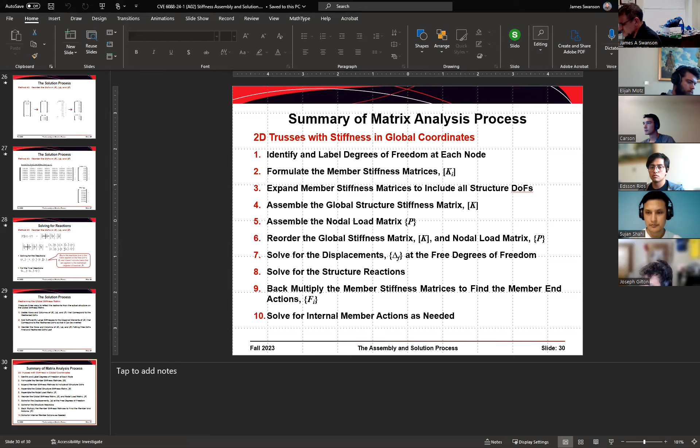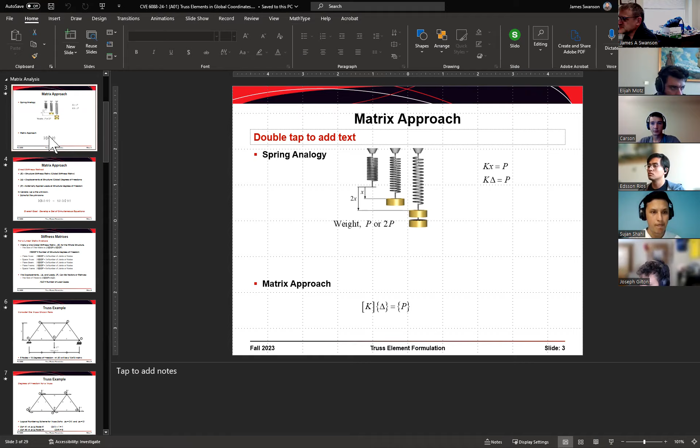So I have a series of 5 or 6 different analysis lectures that I worked through. The way these are structured is that the first 2 kind of go together. I have it broken down into lecture 1 and lecture 2, but after lecture 1, you still don't quite know enough to do anything. So we're going to try and work through both of these lectures and see how far we get today. This is a little bit on the technical side.

So if you're somebody who didn't like the linear algebra classes you've taken, or the matrix analysis operations, this is probably going to be the least entertaining or least interesting part of the class for you. But I think going through this material and understanding how the matrix operations are performed behind the scenes makes you a better user of the software in the end. So even if you don't do the matrix operations when you use SAP 2000 or visual analysis, understanding what's going on behind the scenes will make you a better user of the software in the end. So that's why we go through this.

All right, so everybody probably remembers the spring system that you were taught in physics. The idea is, if you have a spring with some known stiffness, you apply a load to it, you get some displacement X. If you apply 2 times the load, you get 2 times the displacement X. So we can write the relationship that K times X is equal to P, or K times delta is equal to P.

In that relationship, K is the stiffness of the spring, X or delta is the displacement that results, and P is the amount of force or load that's on that. So what we're going to do is expand on that single degree of freedom system, one value for delta, into a multiple degree of freedom system that is more usable for us in structural analysis.

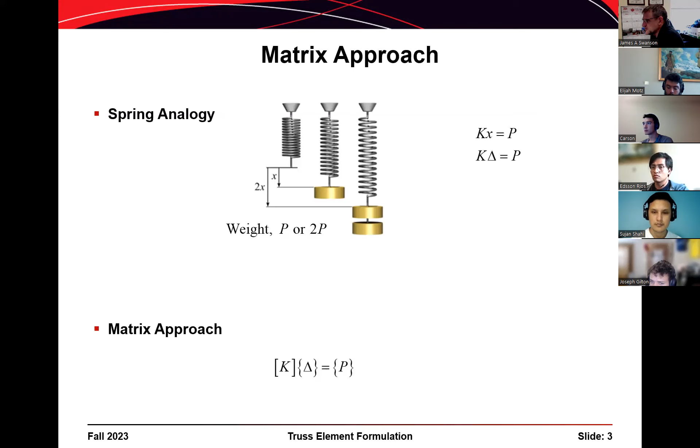We're going to rewrite that equation, K times delta equals P, in the form of matrices. We end up with a stiffness matrix K times some displacement vector delta equal to a vector of loads P. In that equation, K is the structure stiffness matrix, and I'm careful to define it as the global stiffness matrix. Delta is a matrix of displacements that the structure will undergo due to externally applied loads, and the P vector is the externally applied loads on the structure.

So I'm careful here with my notation. We're going to introduce another value of K in a minute, K sub I, which is a stiffness matrix associated with a specific member within the structure, and that's different than the structure stiffness matrix. So the notation gets a bit tedious — K is different than K sub I, and I just want to call that out to avoid confusion.

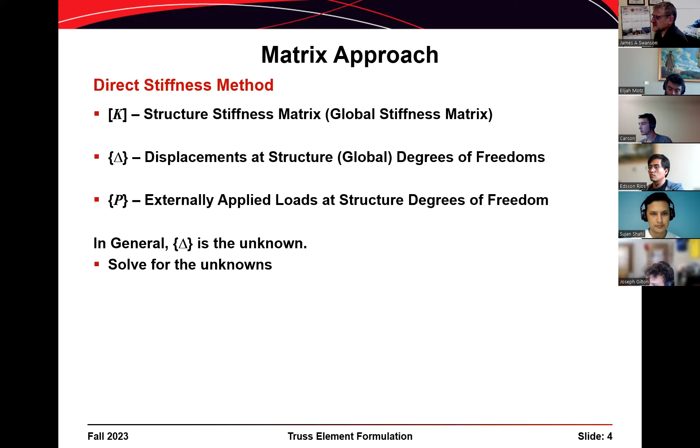The premise is that the displacements are the unknown quantities. If we know what the stiffness matrix K is, and if we know the loads applied to the structure, we can solve a system of equations to determine delta. Basically, in matrix operations, we would invert K, multiply K inverse times the load matrix P, and that gives us the displacement vector delta.

Overall, the goal is to develop a set of simultaneous equations that can be solved for the unknown displacements. This has its roots in linear algebra, and it's ideal for a computer because computers are perfect at solving sets of simultaneous equations. That's one of the ideal solutions for a computer. So if we can structure the problem to get a system of equations, the computer is an ideal tool to solve it.

So some definitions. If we have a linear static analysis, that means the loads are static loads — we're not talking about dynamic loads like you might see in an earthquake. If everything is linear, with no yielding or nonlinear behavior, then there is one global stiffness matrix for the whole structure. There's only one — not two, not zero — exactly one global stiffness matrix.

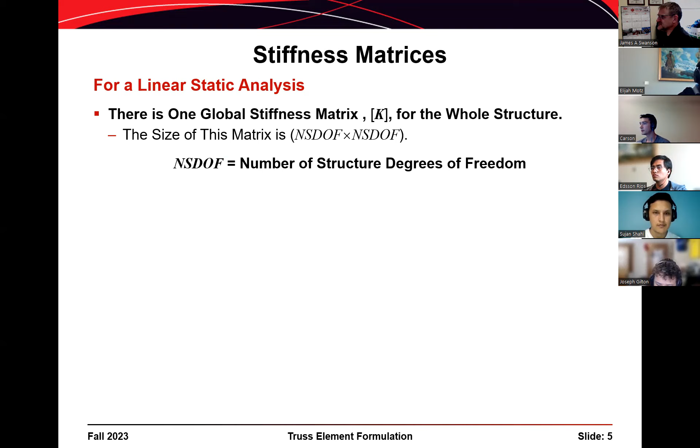The size of that matrix, which you'd call the rank if you were a mathematician, is the number of structure degrees of freedom by the number of structure degrees of freedom. So the matrix has NSDOF columns and NSDOF rows — actually, rows and then columns.

If we look at the different types of structures we can consider: for a plane truss, there are 2 degrees of freedom at every node. For a space truss, there are 3 degrees of freedom at every node. For a plane beam, there are 2 degrees of freedom per node. There are 3 for a plane frame, and 6 if we consider a space frame.

The displacements, delta and P, can be either vectors or matrices. The size of these matrices is the number of structure degrees of freedom for the rows, and the number of columns equals the number of load cases we consider.

So if we look at homework number 2 that you guys are doing for your beam stuff, there are 3 service cases, plus some load combinations that go along with it. For those 3 service cases, you would end up with 3 columns for your delta matrix and 3 columns for your load matrix P.

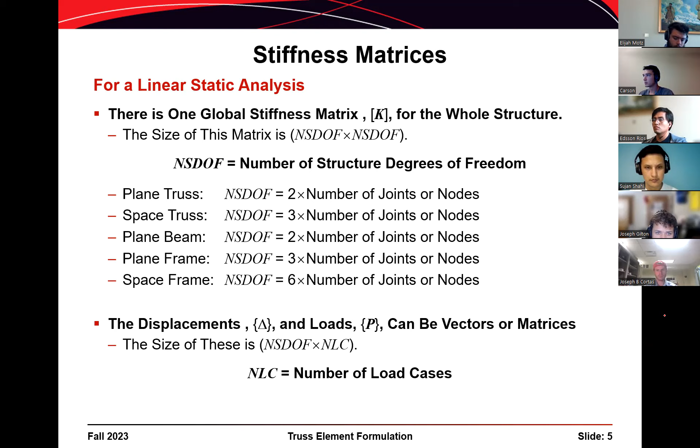All right, so let's go back to this truss that we were tinkering with last week, and we'll use this as an example. What I'm going to do is set this up as an example problem to illustrate the direct stiffness method.

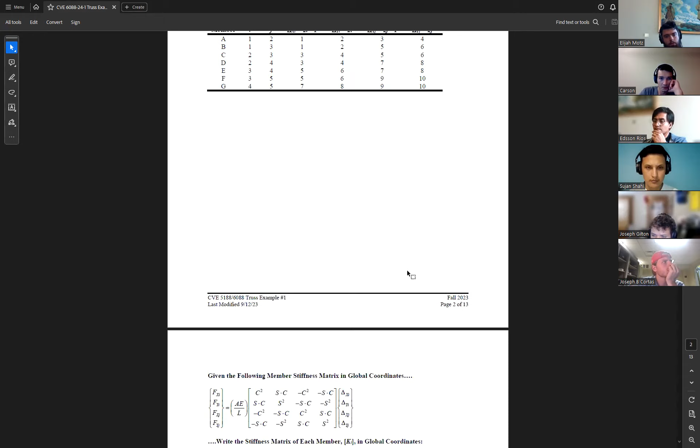For this particular truss, we have 5 nodes labeled 1 through 5. If each node has 2 degrees of freedom, then we have 10 degrees of freedom total. Our global stiffness matrix, K, will be a 10 by 10 matrix.

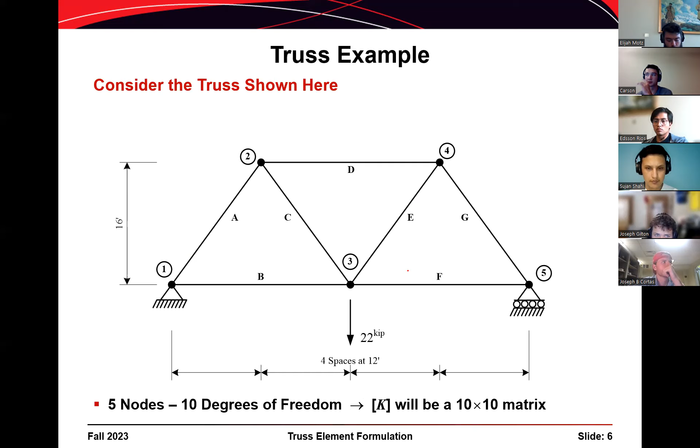So we need to number the degrees of freedom somehow. What we typically do when there's 2 degrees of freedom at each node is we label one degree of freedom 2 times I minus 1, and the other degree of freedom 2 times I, where I is the number of the node. You guys went through this exercise as part of homework number 1, so hopefully this is old hat for you at this point, something you're familiar with.

For example, degree of freedom number 1 would be the displacement in the x direction at node number 1. So 2 times I is 2 times 1, minus 1 is 1. For example, degree of freedom number 8 is the y displacement at node number 4. 2 times 4 is 8.

So what we're going to do then is define what a stiffness coefficient is. One element of our stiffness matrix, K, is K sub ij. When I use that notation, K sub ij, I is the row number, J is the column number. This is probably consistent with your math classes.

So when we look at this, then we have the stiffness coefficient Kij defined as the force at the location and in the direction of the degree of freedom I that's required to cause a unit displacement at degree of freedom J, where all other displacements are taken as 0. You could read that 5 times and still need to think about it some more. It's an involved definition, but maybe if we illustrate it here with some graphics, that'll help.

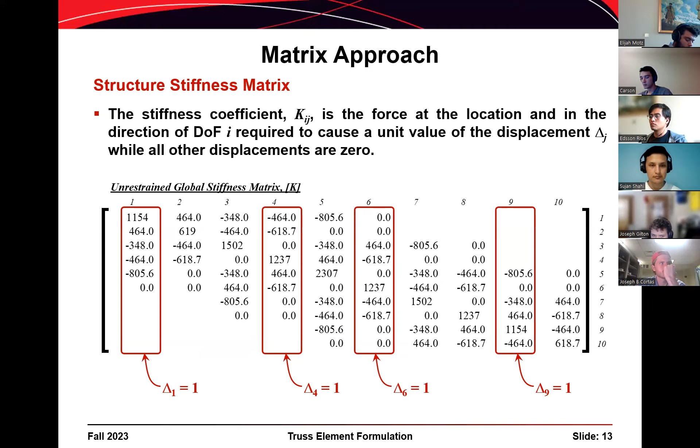All right, so that's the global stiffness matrix for the structure, K. And then now moving on to the next slide. For every structure, there's one element stiffness matrix for each element or each member within the structure. And so the element stiffness matrix has a notation K sub I, where I is the member number that you're examining. So for the truss that we were looking at, there were 7 members, so there'd be 7 element stiffness matrices corresponding to those 7 members.

For each one of these element stiffness matrices, the size is equal to the number of member degrees of freedom, and each of these matrices is also square. So NMDOF is the number of member degrees of freedom.

If we go back and look at a plane truss, there's 2 degrees of freedom at each end of a truss element or each end of a truss member. So that means we have 4 total degrees of freedom for each truss member. So each truss member stiffness matrix, K sub I, will be a 4x4 matrix.

If we go to the bottom, for each space frame member, we would have a 12x12 member stiffness matrix or element stiffness matrix. K sub I is the element stiffness matrix in terms of the global coordinate system. And we also have delta sub I, that is a vector of element displacements in global coordinate systems.

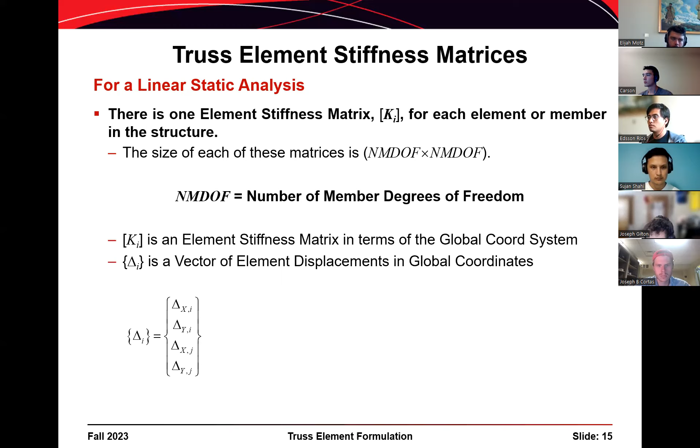Now what I'll do is bring in an element like this that has the forces outlined in there. So we have K sub I, we have delta sub I, and we have F sub I.

What's important is that we could recognize, and this is going to be the topic of a different lecture later on, that there is a local coordinate system for each one of these elements as well. So we have a capital X axis that is the global X coordinate system, a capital Y axis that's part of the global coordinate system, but we also have a lowercase x axis, a lowercase y axis that is the local coordinate system for each one of these members.

What's important is that when we have a capital K, that indicates that we have an element stiffness matrix in the global coordinate system. Later on, we'll introduce a lowercase k that is the element stiffness matrix written in local coordinates instead. I think that's the topic of the third lecture that I posted. We're not going to get there today, but if you wanted to look ahead a little bit.

There's also a local displacement vector delta, that's the displacements in the local coordinate system. And then there's a lowercase f that is the member end actions of the element in local coordinate system as well. I'll just give you a little bit of foreshadowing there, tying into the idea of local versus global degrees of freedom that we discussed last week.

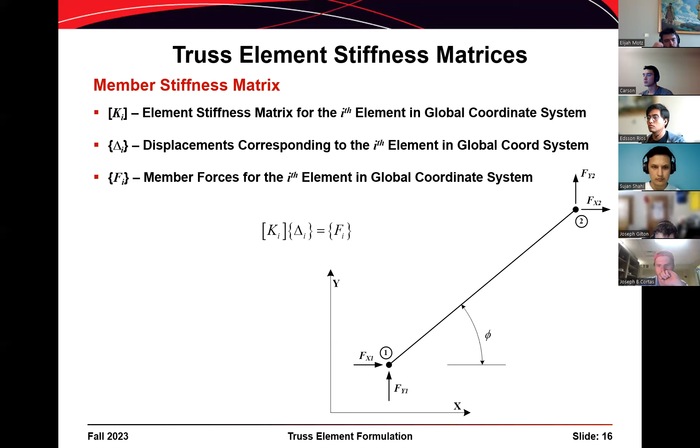In this case, F sub I becomes the member end actions, and we can use those to calculate the forces that are in the member itself. So in the context of a truss member, we would be calculating axial force. In the context of a beam member, we would be calculating shear forces and bending moments. And that's what that value of F is.

So the next trick then is, what is the element stiffness matrix K sub I for a truss element? And we can write it like this. So we have the term AE over L, which you guys will recognize as the axial stiffness for a member subjected to an axial force. And then we multiply by a 4x4 matrix of our directional cosines.

So the 1,1 element is the cosine squared. The 2,2 element is the sine squared. And then we have the cosine of phi times the sine of phi, in the 1,2 and the 2,1 element. And so that's how you determine what these element stiffness matrices are, by using that formulation.

Now, you'll note that there's two sets of repetition here. Number one, this matrix is symmetric like the global structure's stiffness matrix is, but there's also some symmetry in that block is equal to that block there, and then this block up here in the upper right is equal to this block down here in the lower left. So really, there's only four discrete values, well, maybe even 3 discrete values, not counting plus and minus signs that are in there.

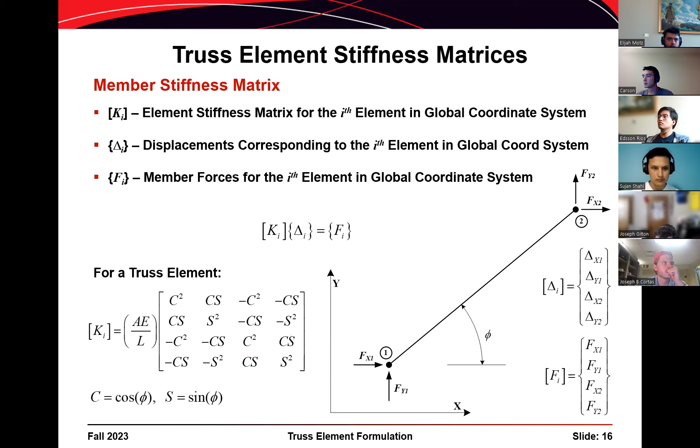All right, to determine the element stiffness matrices, you can calculate the directional cosines. I think I showed this slide as part of one of our introductory slideshows.

So homework number 3 is going to involve going back to the truss that you looked at in homework number 1 and calculate the element stiffness matrices, then assembling that into a global structure stiffness matrix, and then inverting it and finding the displacements. You've already done the first part of that in calculating the directional cosines and the lengths of the members. So you're not halfway done, but you're part of the way done with that.

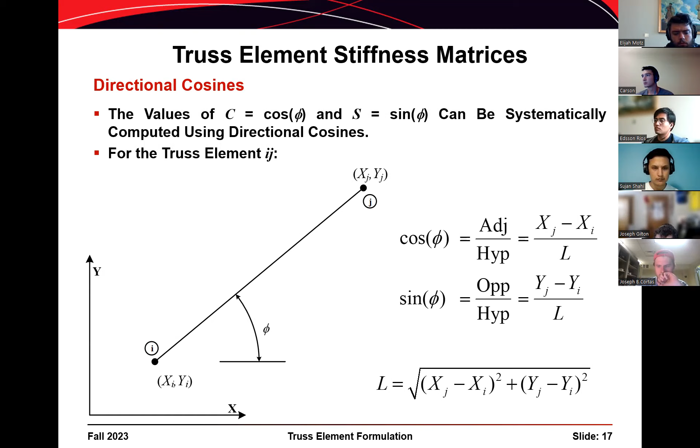So to summarize, the stiffness coefficient Kij is the force at degree of freedom I required to cause a unit displacement at degree of freedom J while holding all other degrees of freedom at 0.

And some other properties here: the stiffness matrix is always symmetric, and for a 2D truss element, this is our element stiffness matrix. You can write it a couple of different ways. I've got it written as AE over L times the 4x4 matrix of directional cosines, and you could also write it with K11, K12, K13, etc.

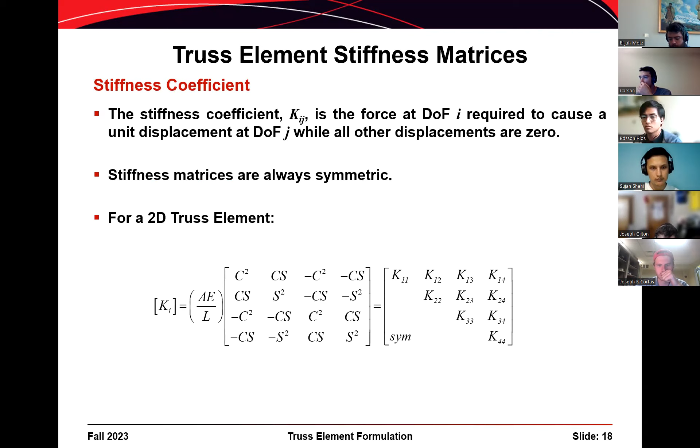Now, to determine this element stiffness matrix, we go back and use the same approach that I illustrated before. What I'm going to do is impose a unit displacement that corresponds to each of the 4 degrees of freedom for the member.

When I do that, I'm going to need forces that are required to hold each one of those degrees of freedom at its displaced magnitude or displaced location. So if I move that degree of freedom to 1 to the right at delta x at the first node, then I'm going to need forces that correspond to that.

Let me go back to red. So I'm going to need a force here. I'm going to need a force there. I'm going to need a force up here, and I'm going to need a force like that.

So this is going to be the force in the 1 direction. This is the force in the 2 direction resulting from a 1 degree of freedom displacement. This is the force in the 3 direction corresponding to a 1. And this is the force in the 4 direction corresponding to a displacement in the 1 degree of freedom.

So basically what I've done is derived the first column in that stiffness matrix. Note that for the row 3, column 1 element, it's actually negative, and that corresponds to this force pointing to the left - it points opposite of positive, so it's a negative value, and that makes sense. The row 4, column 1 element is also negative, corresponding to this force pointing downwards instead of pointing upwards in the positive y direction.

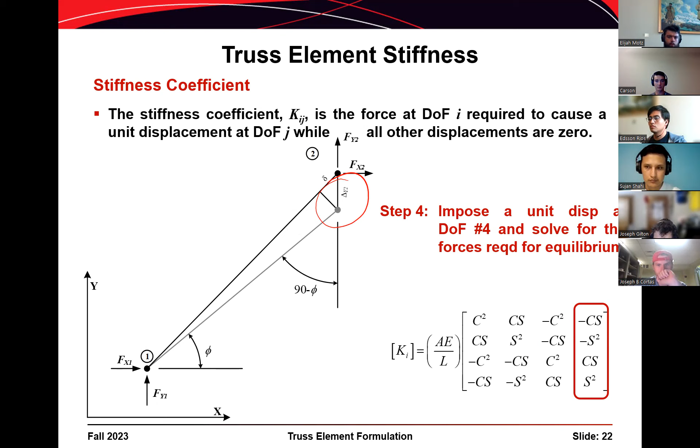So if we apply this process to our example truss with 5 nodes and 7 members, there should be 7 element stiffness matrices, one for each of the members A through G, and we could go through and write those out like this.

So we have 1, 2, 3, and 4 there for A, B, C, and D. And then we can go through and here we have E, F, and G as well.

If you go and look at the example problem that I posted, the first step was to compute the member connectivity. Member A goes from node 1 to node 2, member D goes from node 2 to node 4. Here are the nodal coordinates: the x coordinate of the ith node, the y coordinate of the ith node, the x coordinate of the jth node, the y coordinate of the jth node. Here's the length L, and here are the directional cosines.

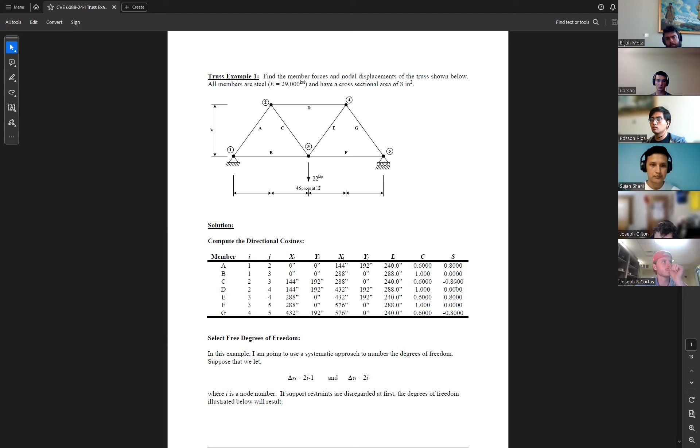You just go through with a spreadsheet and calculate those out. Then the next step is to label the degrees of freedom. So here's like a decoder wheel, if you will, or a rubric or a matrix that shows what the degrees of freedom are for each of the nodes.

So for member A, for example, it connects node 1 to node 2, so the degrees of freedom associated with that member are 1, 2, 3, and 4. Member A is right here, and we have degrees of freedom 1 and 2 at its first end and degrees of freedom 3 and 4 at its second end.

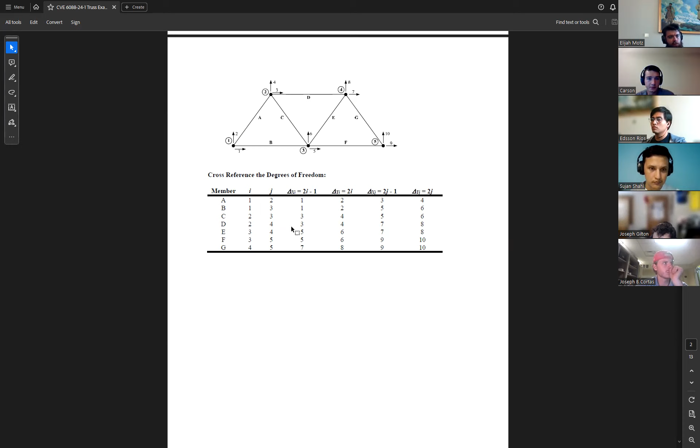If we look at member D, for example, it connects nodes 2 and 4. So the degrees of freedom at the first end are 3 and 4, and the degrees of freedom at the second end are 7 and 8.

And then finally on page 3, I go through and calculate the stiffness matrices for each of the 7 elements that are in the structure.

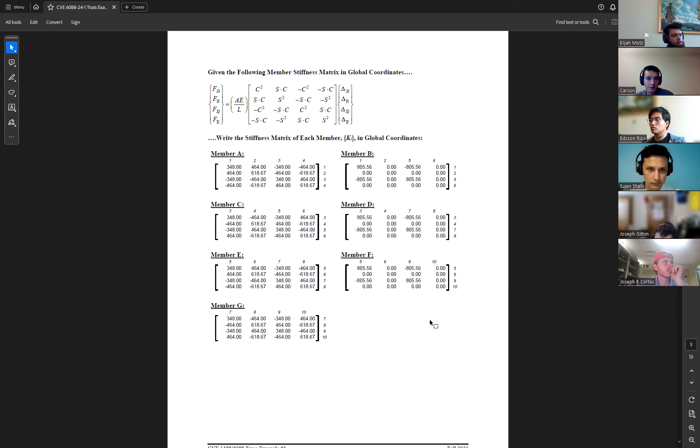Now, if we go and look at the spreadsheet that's behind this, it's formatted a little bit differently. This is my element stiffness matrix calculation. Here I'm just entering the area of the member, the modulus of elasticity of the member, the x location of the ith node, the y location of the ith node, the x location of the jth node, and the y location of the jth node.

And then here, wherever there's an equal sign, that's something that's calculated. So I'm calculating the length at 240 inches, calculating the cosine of phi, the sine of phi. Then over here in my stiffness matrix, I'm just calculating AE over L, multiplied by cosine squared. If I go down to the 2 element of that matrix, I have AE over L again multiplied by sine squared.

So this is not very complicated, it's simple math. But it can be challenging because it's easy to screw up the indices and put the wrong element in the wrong space.

I'm labeling the rows and columns of each member stiffness matrix to correspond to the global degrees of freedom. For example, let me go back a couple of slides. Member A connects degrees of freedom 1, 2 to 3 and 4.

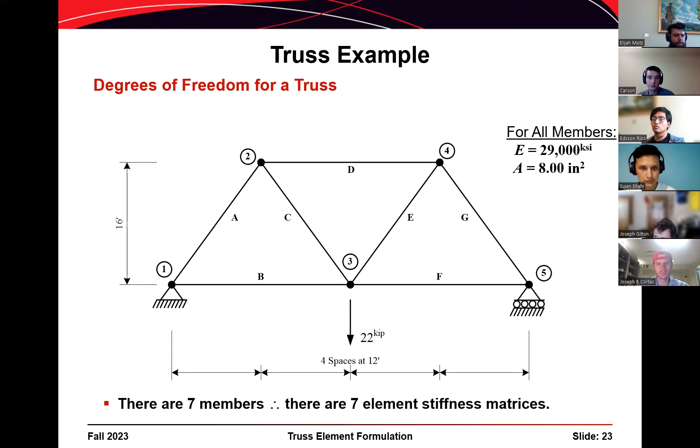If we look at member D, let me go back to an earlier version. Here we go. Member D connects degrees of freedom 3 and 4 at its i-th end to degrees of freedom 7 and 8 at its j-th end. So we have rows 3, 4, 7, and 8. That's how this is all laid out.

So when you guys go through and do homework number 3, I expect you'll lay out your spreadsheet in a way similar to this.

Now, I get a little anal retentive about this. I actually have a column here that represents the brackets to each side of that. I've gotten to the point where I usually just put a vertical line on that now, so that's a little bit superfluous when it comes to the math. It's certainly not required. There are 7 of these matrices broken out, and there's some extra math here, but we haven't gotten far enough to explain all of that yet.

All right, let's go back to PowerPoint and pick up where we were. So we have those 4 stiffness matrices and those 3 stiffness matrices, so we have 7 matrices total.

Now, after we go through and solve for the displacements delta, we can solve for the member end actions, or the member forces F, based on those displacements. There are 4 of them for each truss member, 6 for each 2D frame element, and 12 for each 3D frame element.

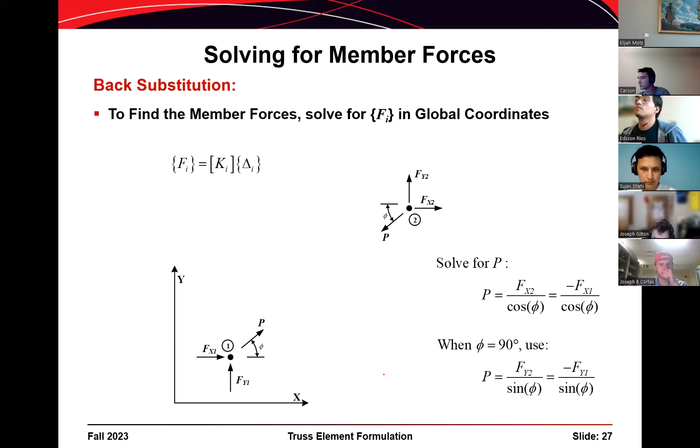Now, in order to determine these, we actually have to go through and do our linear algebra. We actually have to solve a 10 by 10 set of equations to get these displacements. So I've skipped that step in this presentation, but once we know what those displacements are, we can solve for our member end actions.

So, to close out this presentation, we present a step-by-step procedure, since you students all love that. The first step is to identify and label each degree of freedom at each node. Then we need to formulate member element stiffness matrices, k sub i.

There'll be one for every member or every element in our structure. Then we need to go through the process to develop the global stiffness matrix. We need to solve for the global displacements delta. And then after we're done with that process, we can do our back substitution and get the member end actions F, and then we can figure out what the internal member force P is.

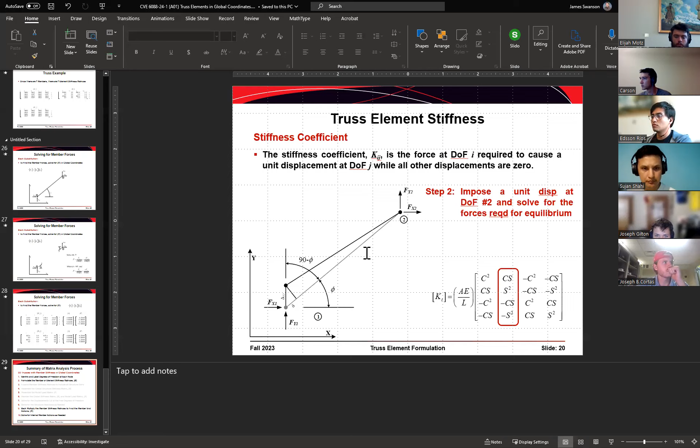All right, so here's the second lecture. I call this lecture A2, A for analysis, obviously 2 because it's the second lecture. And so what we're going to do in this lecture is discuss the steps that I skipped over in the last one. So I skipped steps 3 through 8, and that's basically what we're going to discuss here.

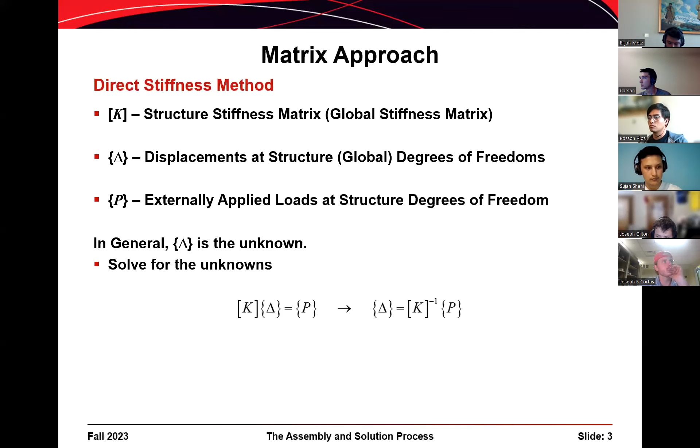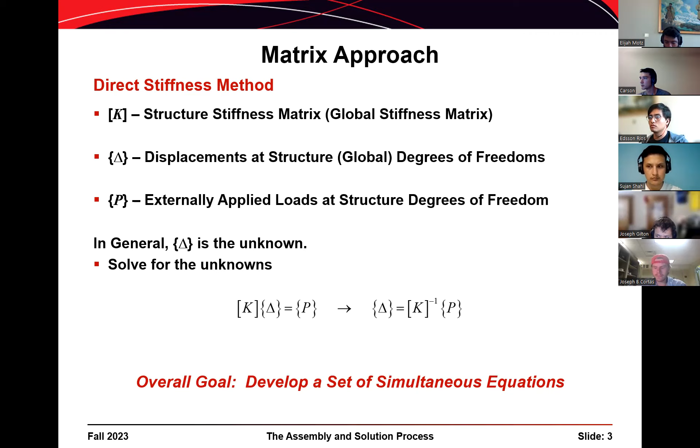As a reminder, in case I give this lecture in a different class than the last one, from our direct stiffness method, we want a global stiffness matrix K, we want global displacements delta, we want externally applied loads P, and we're developing a system of equations where we can solve all of those simultaneously. We want K times delta equals P, solve for delta, and then once we know what the delta values are, then we can determine member forces.

All right, so the question is, though, how do we get from the element stiffness matrices to the global structure stiffness matrix? How do we get from the K sub i's to the capital K? And so that process is almost universally referred to as the assembly process.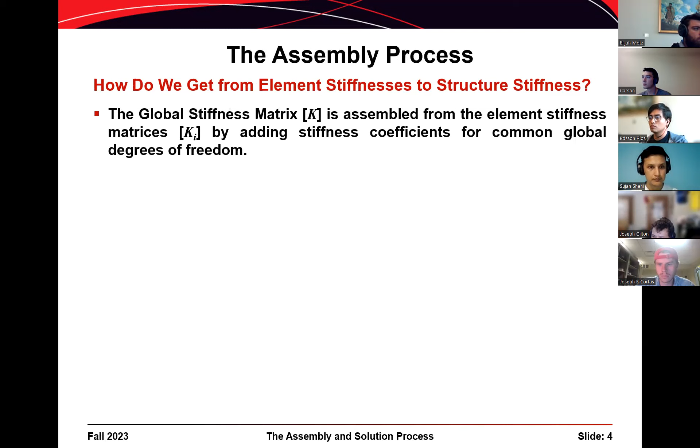So what we're going to do is for our example truss, we're going to take 7 element stiffness matrices and assemble them into a global stiffness matrix. We're going to take 7 4x4 element stiffness matrices and assemble it into one 10x10 global structure stiffness matrix.

And so that process is involved because you can't simply add these matrices together. You can't take 7 4x4 matrices, add them together and get a 10x10. You're violating the laws of the universe, and somewhere a black hole will implode upon itself, and no mathematician will ever be happy with that. So we need a process to do this.

What we have to recognize is that these stiffness matrices are intimately correlated with, or tied to, the degrees of freedom that each of the members or each of the elements connects. So for member A, for example, it connects degrees of freedom 1 and 2 with degrees of freedom 3 and 4. Member B, for example, connects degrees of freedom 1 and 2 with degrees of freedom 5 and 6.

And so if we added these 2 element stiffness matrices together, we wouldn't necessarily be violating the laws of the universe for the upper left quadrant, because those correspond to the same degrees of freedom. But for the rest of the matrix, it just wouldn't work out. We would be adding a stiffness coefficient for, say, the 1-3 degree of freedom to a stiffness coefficient for the 1-5 degree of freedom, and that's just not okay.

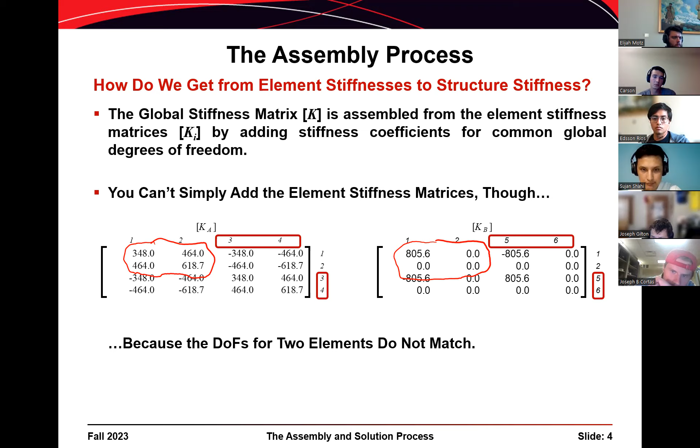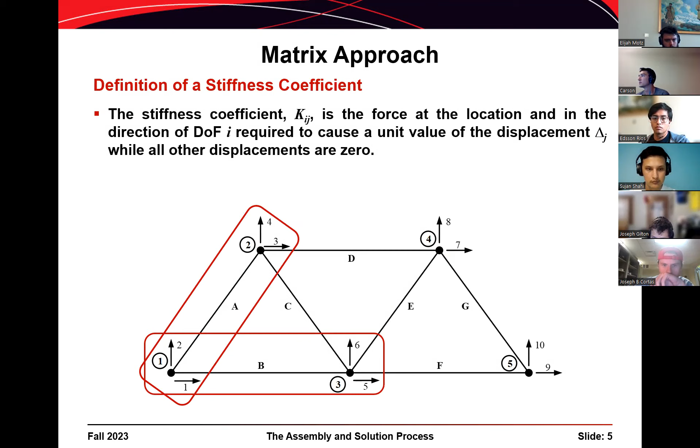So here's some language just describing what I just said: member A correlates to degrees of freedom 1, 2, 3, and 4, whereas member B correlates to degrees of freedom 1, 2, 5, and 6. So what we need to do is expand each of these member stiffness matrices so that they have the same size as the global stiffness matrix. We're going to recognize that with member A, it's not connecting degrees of freedom 5, 6, 7, 8, 9, or 10.

So we can expand the stiffness matrix for member A and just put in zero values for the remaining rows and columns. We go from K sub A, a 4x4 matrix, to the expanded version, a 10x10 stiffness matrix. I don't bother to write the zeros in a lot of cases because it just muddies the presentation, and it makes it more obvious, I think, to leave those cells blank than to put zeros in there.

Now, if we do the same thing with member B, what we're going to find out is that columns 3 and 4 are blank, rows 3 and 4 are blank. So the expanded version of the element stiffness matrix for member B would look like this. After you expand the 7 element stiffness matrices corresponding to their associated degrees of freedom, you can add those expanded stiffness matrices together.

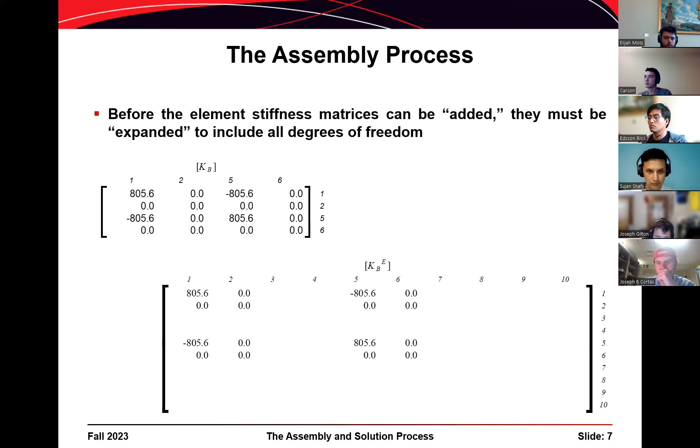So what we can do now is add K sub A expanded to K sub B expanded. And when you do that for all 7 of the element stiffness matrices, then you get the global structure stiffness matrix that looks like this.

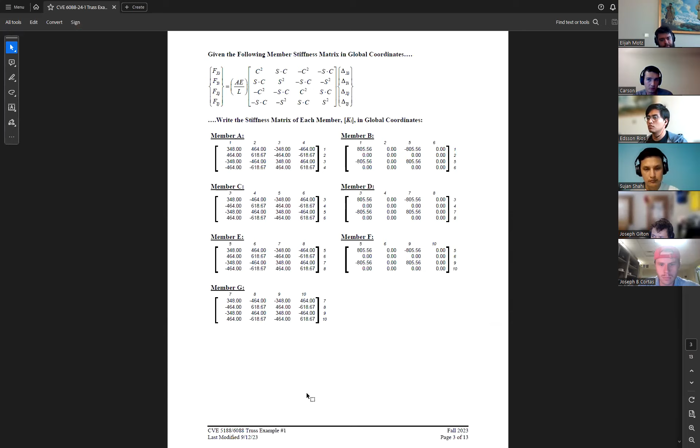All right, now what does that look like in our spreadsheet? Let me look at the PDF first, which is here. So I think the next page, yeah, so I go through and I write the expanded stiffness matrices. Each one of these expanded matrices is a 10x10.

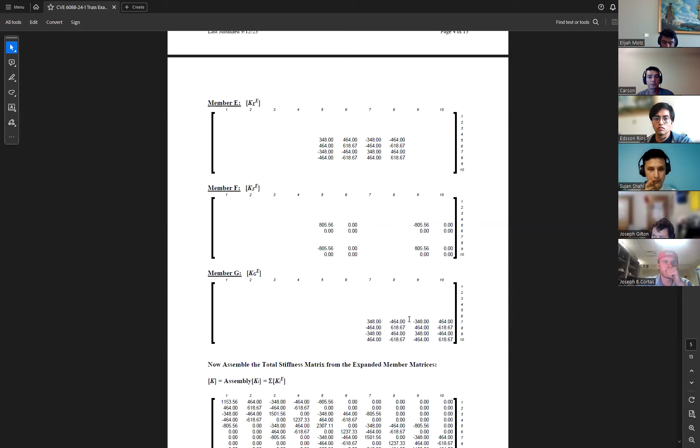So if we look at the expanded stiffness matrix for member D, for example, it connects degrees of freedom 3 and 4 with degrees of freedom 7 and 8. And so now I can take these 7 expanded stiffness matrices and just add them together using conventional matrix operations, and then I get the global structure stiffness matrix.

In this case, since I just did arithmetic in Excel, there are actually zeros in that stiffness matrix.

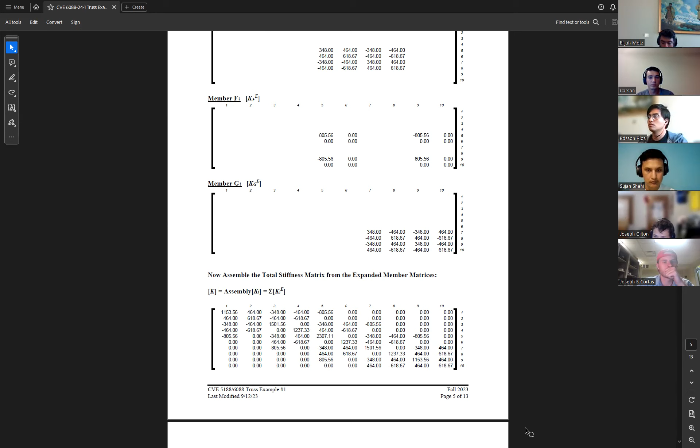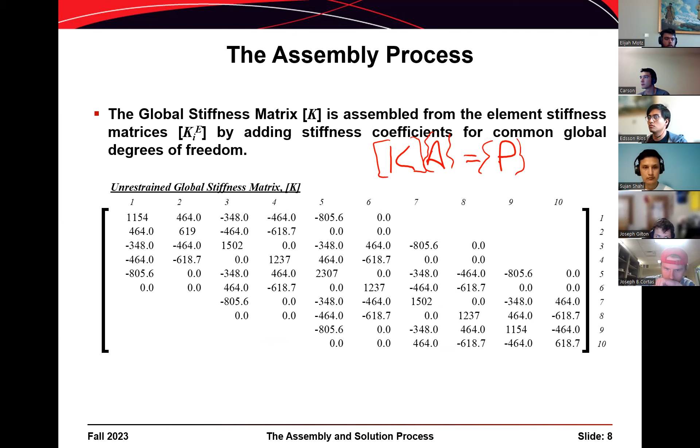So then the next step, going back to our equation that we want to use, K times delta equals P, written in matrix notation, we need to know what the P vector is. We need to know what the vector of applied loads is. So we go back to our structure and we look at the loads that are applied to the structure and we correlate them to our degrees of freedom.

Now, we only have one point load on the structure. It's applied in the vertical direction at node 3. So it's a load of 22 kips that corresponds with the Y direction, so it's going to be correlated with degree of freedom number 6. But it acts in the opposite direction of what we said degree of freedom 6 is — we said degree of freedom 6 acts in the positive Y direction, so there's a negative value on that magnitude of 22 kips. And then the rest of the elements of our P matrix are 0.

All right, so the next step would be to invert the stiffness matrix and multiply by the load matrix. But the problem is that if we try to invert our 10 by 10 stiffness matrix now, we're going to get an error because it's a singular matrix. It can't be inverted. The corresponding structural ramification of that is that we haven't told the stiffness matrix yet which degrees of freedom are restrained — we haven't indicated at all where the supports for the truss are. So what we need to do is restrain that stiffness matrix, and there are basically 3 different ways of doing that.

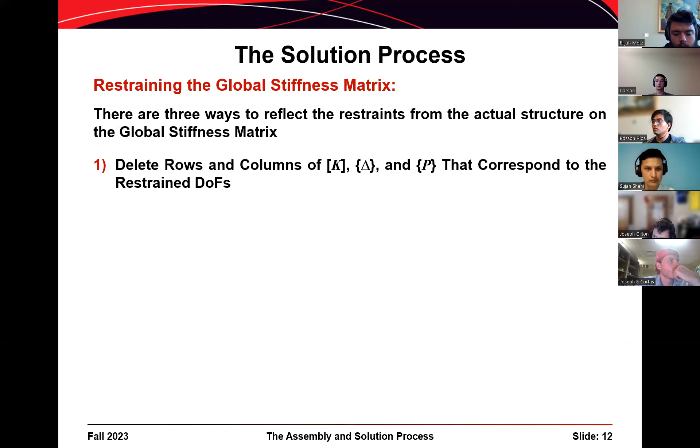The first way is to simply delete the rows and the columns from the stiffness matrix K, the displacement vector delta, and the load vector P that correspond to the restrained degrees of freedom. The second approach is to add sufficiently large stiffnesses to the diagonal elements of K that correspond to the restrained degrees of freedom. The third approach is to reorder the rows and columns of K, delta, and P, putting the unrestrained degrees of freedom first, then the restrained degrees of freedom last.

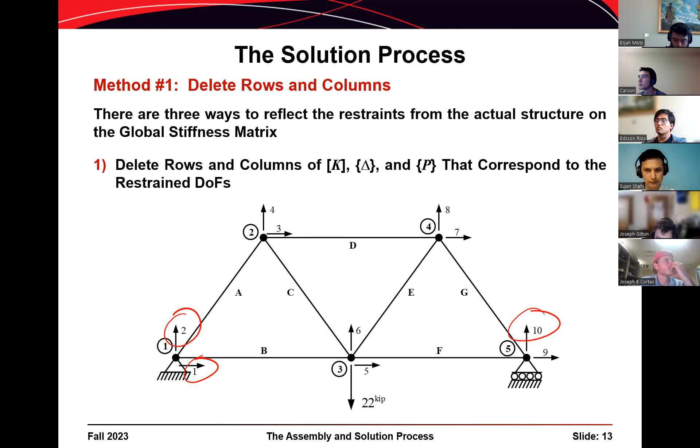Let's look at the first one. If we're just going to delete the rows and columns of K that correspond to the restraints, then degrees of freedom 1, 2, and 10 should be deleted. 1 is restrained by that pin, 2 is restrained by that pin, 10 is restrained by the roller, but 9 is not restrained. So we go into our global stiffness matrix K and delete the rows and columns that correspond to the 1, 2, and 10 degrees of freedom.

The resulting matrix is a 7 by 7, and we refer to it as a free stiffness matrix. The columns of this matrix represent the free or unrestrained degrees of freedom, and the rows of this stiffness matrix also represent the free or unrestrained degrees of freedom. I got that backwards—it's actually rows first and then columns second. So I screwed that up.

Sorry. We also need to do the same thing for the load vector P. So we know degrees of freedom 1, 2, and 10 are restrained, so we delete those from our load vector, and we end up with a 7x1 vector of loads.

Then when we go through our solution process, here is the free stiffness matrix. We can invert that and get K inverse. We multiply the inverted stiffness matrix by our load matrix. And ultimately, what we end up with is a matrix of displacements, delta F, that correspond to the free or unrestrained degrees of freedom.

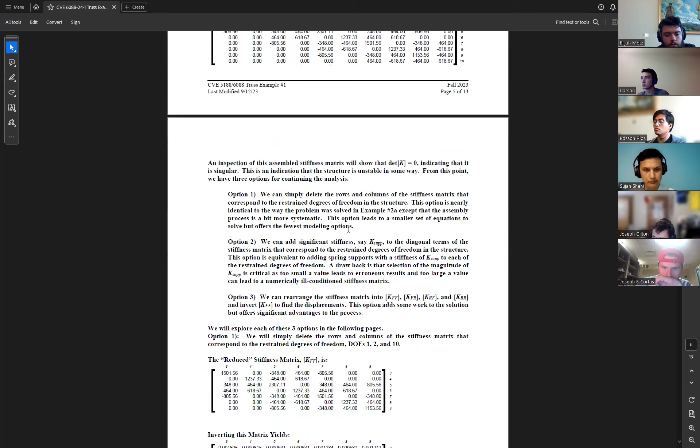If we go over here to our PDF, there's the 10x10 stiffness matrix. Here are the three options described briefly. If we go through and look at the first option right here, what I've done is deleted rows 1, 2, and 10, columns 1, 2, and 10. I invert that matrix, multiply by the load matrix, and here's my displacements.

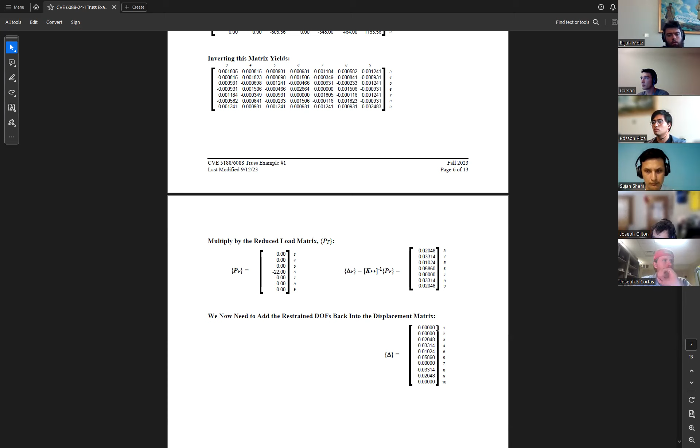You can augment this displacement matrix after you go through the solution process and reintroduce rows 1, 2, and 10. We know by default, if those degrees of freedom are restrained, then the displacements at those degrees of freedom should be 0. So that was option number 1.

Let's go back here. What is option number 2? Option number 2 is that we can add sufficiently large stiffnesses to the elements of K that correspond to the restraints. Let me take a second here and remind myself what's coming up. Right, okay, so that's what I thought.

So if we go back to our degrees of freedom, let's see here, we'll go to that slide. We know that degree of freedom number 1 is restrained. It doesn't matter how much force we put on it in that direction, that node won't move. I don't know why that won't go.

Let's try over here. Degree of freedom 10 is restrained, and no matter how much force we put on it, it won't move. So we can have an F value that is theoretically equal to infinity because that has a stiffness that is infinitely rigid. I didn't say that very well—the stiffness associated with degree of freedom 10 is infinite. The same thing goes for degree of freedom number 1 and degree of freedom number 2.

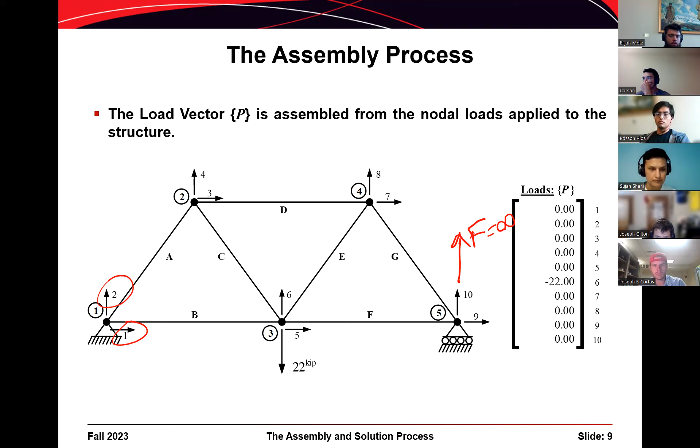So if we go back to our stiffness matrix, what we can do is add very large stiffnesses to those degrees of freedom. Based on the unrestrained structure, we would have a stiffness coefficient K11 equal to 1154 kips per inch. And if that is a restrained degree of freedom, then that's really going to be infinite, right?

So we could go in and say that those values are going to be infinity. Well, when you try and write infinity in a computer, it doesn't work out very well.

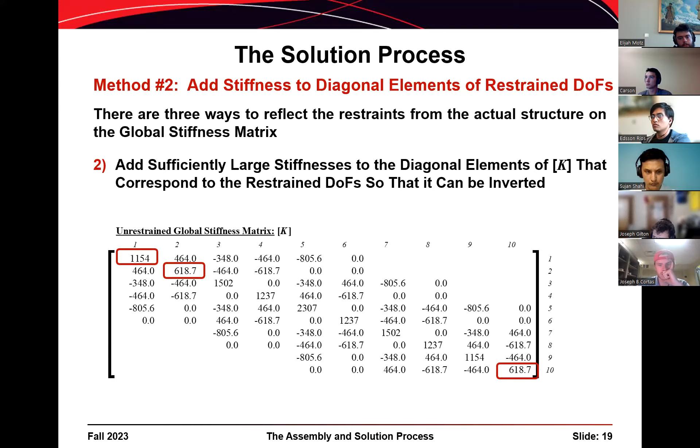So what you do is come up with a number that is several orders of magnitude larger than the original value. And then when you go through the solution process, you end up with the same end result. So if the original value was 1154 or 619, we could make the new value 100 million, 1 times 10 to the 8th, which is many orders of magnitude larger than the original value.

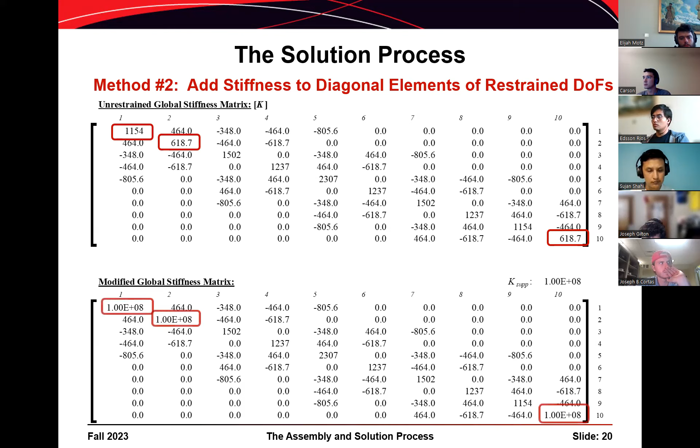In doing that, we end up with a matrix that is now positive definite. We can go through and invert this 10x10 matrix and multiply by our vector of loads to get our displacements. The next question is, how do you know when that value is large enough? It's large enough when you go through this process and end up with zero displacements at the end.

So we actually went through and multiplied through this. We end up with delta 1 equal to 0, delta 2 equal to 0, delta 10 equal to 0. Because those worked out to be 0 in the end, we know that the magnitude we added to those stiffness coefficients, K11, K22, and K1010, was large enough.

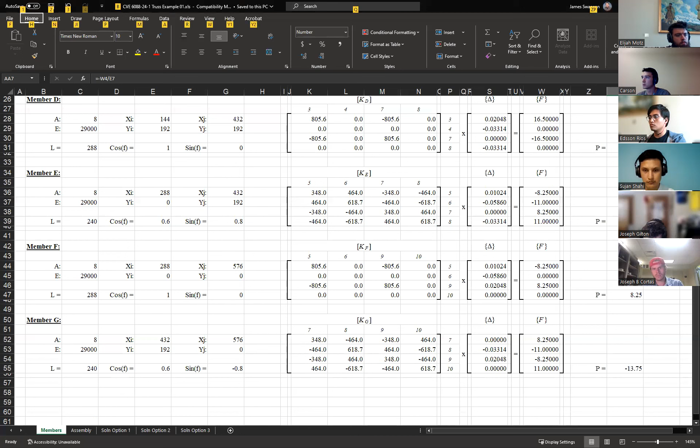So we can actually go to the spreadsheet in this case. If we go down here to solution option number 2, you can vary that number. So I could put in a 0 here, and then I get an error when I try to invert the stiffness matrix because I'm adding nothing to the original value.

So basically what I'm doing is taking the original value and adding whatever value is in this cell. So I can type in, say, 1e to the 4th, and that's large enough that I can invert the matrix. It makes the matrix positive definite.

But look here, I get a non-zero displacement corresponding to degree of freedom 2 and a non-zero displacement corresponding to degree of freedom 10. So those supports are stiff, but they're not infinitely rigid. We're actually getting a support settlement there, right?

I could go in and say 1e to the sixth here instead. Now those displacements are really, really small, 0.00001, but they're still not zero.

So if I go in and type in 1e to the eighth, then those displacements are small enough that they don't show up within the precision of my calculations. If I expand that a little bit, there's probably a non-zero term there, but we only need to work to 4 or 5 significant digits of precision anyway.

All right, so that's how the second method works.

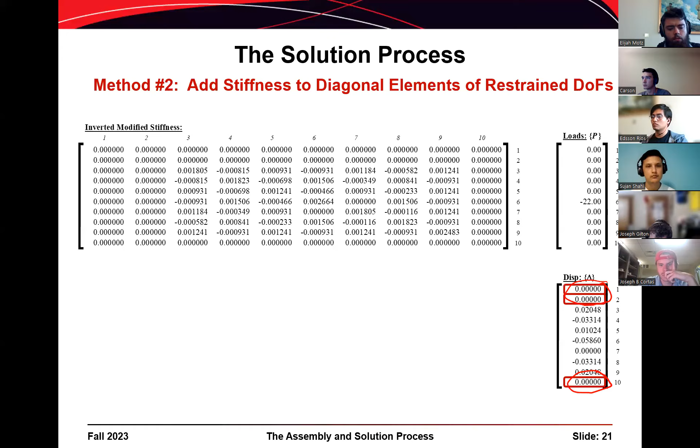The third method is the most complicated, but it's the most elegant and the most useful. I've got about 5 minutes left, so let me go through the theory and then we'll call it to a close for today, and we'll come back and illustrate this on Thursday at the beginning of class.

So the third method of restraining the system of equations, or restraining the stiffness matrix, is to reorder the rows and columns of K, delta, and P. We generally put the free or unrestrained degrees of freedom first and the restrained degrees of freedom last.

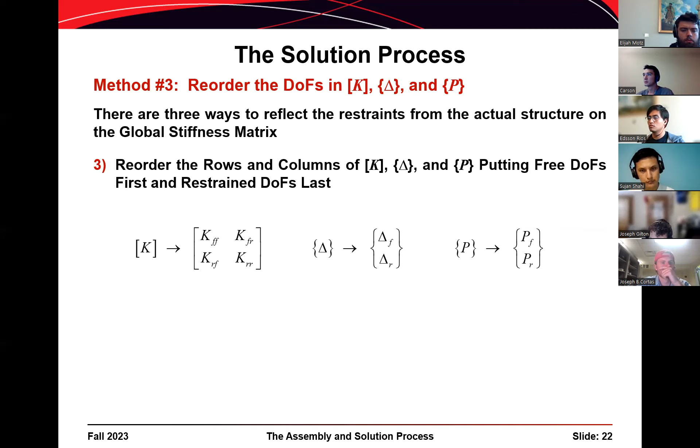So we can rewrite our global stiffness matrix K as a 2x2 matrix of matrices. Each one of those values, K sub FF, is a matrix, K sub FR is a matrix, K sub RR is a matrix. Then we do the same thing for delta, where we have delta free followed by delta R. We have P sub F, P free, followed by P sub R, and F is free and R is restrained.

So if we break that out like this and expand it using matrix operations, we're going to multiply this by this, and that's going to equal this. Plus this times that, right? So that's what I've done here. I've got this times this plus this times this, is equal to that.

And so that's just expanding a matrix of matrices multiplied by a vector of vectors to equal a vector of vectors. The next step is to solve for our displacements, the free degrees of freedom delta sub F.

We can do that using these two equations shown here. If we solve for delta F or delta R in one and substitute into the other, we come up with delta F. It's equal to the inverse of KFF multiplied by the loads on the free degrees of freedom minus KFR times delta R. Delta R in this case is the displacements corresponding to our supported, or restrained, degrees of freedom.

So in a structure like the truss we're examining, delta R is usually 0. If the supports are infinitely rigid, we could take delta R equal to 0, and we end up with basically the same matrix operations as method number 1, where we deleted the rows and columns corresponding to the restrained degrees of freedom.

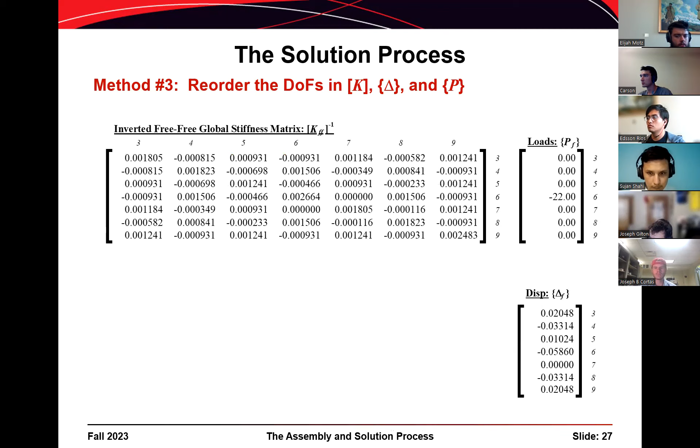So we can break those up and end up with 4 matrices out of our stiffness matrix. Then we can go through our solution process and determine our displacements delta F, and go back through and expand that again to solve for the reaction forces. Another good part of method 3 is that you can solve for the reaction forces directly using matrix operations instead of using equilibrium for each member.

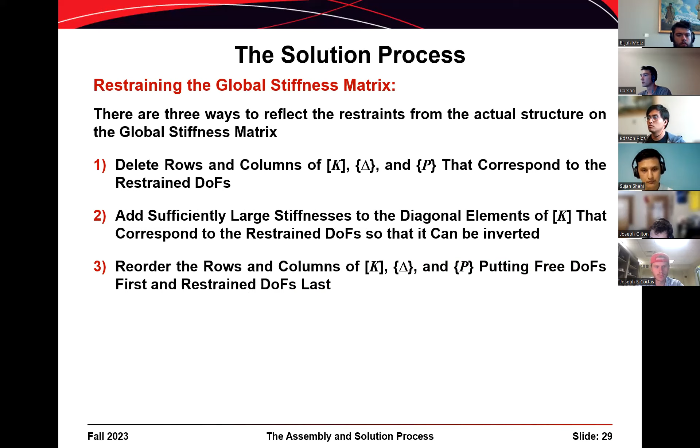So in summary, here are the 3 methods. Method 1 is pretty crude - we delete the rows and columns of the stiffness matrix. Method 2 is a little less crude - we add sufficiently large stiffnesses to the diagonal elements of the stiffness matrix. The third method is to reorder and then go through our expansion of the subdivided stiffness matrix.

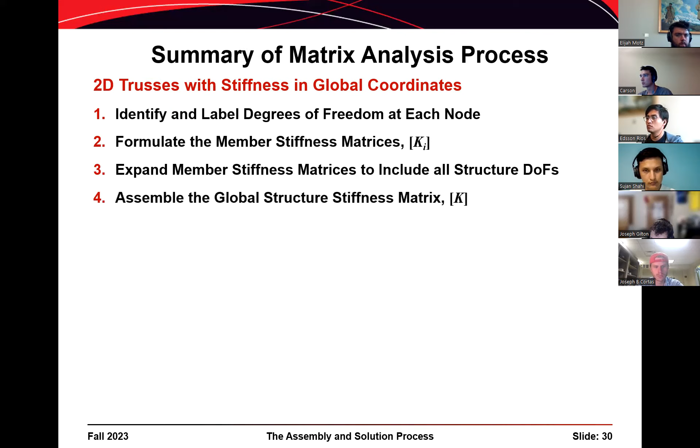So we'll summarize at the end with our step-by-step again. Now we have steps 3, 4, 5, and 6 included in here as well.